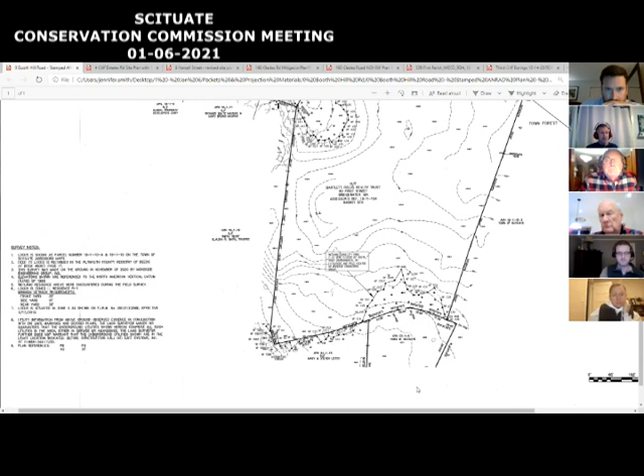I feel like if there's anything that's unclear on the latest version, that the ORAD should reflect that it's unclear, and that our approval is only what we're approving, but that there are other resource areas out there that will warrant additional investigation when a notice of intent is filed.

What do you think about that, Steve? Yeah, and actually you could talk about where the intermittent reach is located. It's located between flags A72 through A63, and A9 perhaps, or A10 to about A1. So that's what I would do with that, to more clearly define the location of the intermittent stream reach. It's not called out on the plan, but you have a line that shows where it was on the original Murphy plan.

Does that make sense to you, John? Yes, it does. And ultimately, the goal of this is to establish the limits of the commission's jurisdiction, with that intermittent stream located within the boundaries of the delineated BVW. Yes, no change within the commission's jurisdiction. All it would do is it would necessitate additional considerations if in the future there is any proposed activity there.

Say there was a roadway that was proposed through there, then we would need to meet the mass stream crossing guidelines associated with the intermittent stream. But it wouldn't extend the commission's jurisdiction by having that delineated. So we're fine with approving the plan as it is, and whatever the commission needs to do to make sure you reserve your rights to review any additional resource areas, that's 100% fine. We're definitely okay with that.

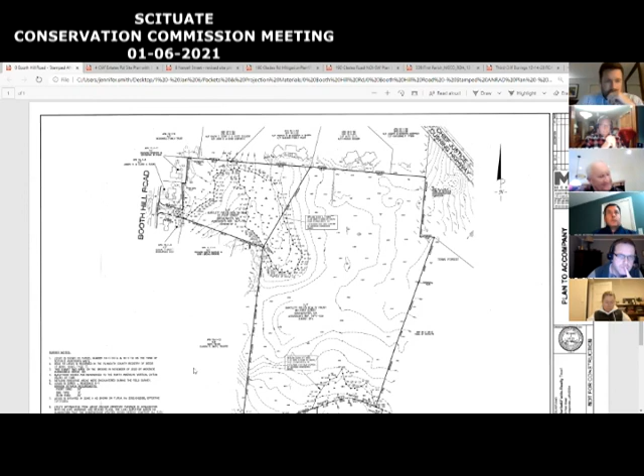Can you hear me now? We can. I just wanted to clarify that none of this plan was on any of the documents that were on the website. And so for you to be acting on it or having a hearing about it when no one can even see it, I think is unusual at best. That's my comment. I find it difficult for you folks to do this without any of the members seeing it and voting on it. Thank you.

Mr. Horsley: I don't mean to belabor this, but if the commission decides to move ahead, I think the minutes should reflect that they're approving a plan that we cannot see tonight. I'd like to see where that stream is indicated on this plan. You're essentially approving a plan that we can't see, similar to what Mr. Badger just said. I'd suggest either we pull up the plan tonight and look at it, or we continue to the next meeting.

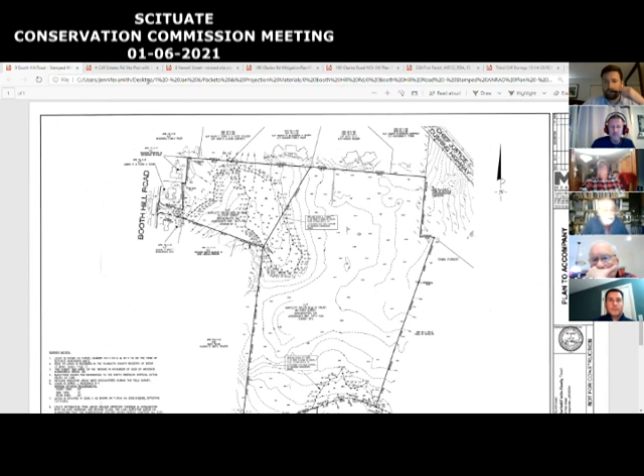4 Cliff Estates Road. This is Morse Engineering. Do we have somebody from Morse? Oh, Bill has a hand up. Yes, this is Greg Morse, I'm here. Greg, hold on one second.

Bill, do you still have a hand up for something? Can we unmute him, Amy? Bill? Oh, it looks like he took it down. Yes, my question is, I know the hearing was closed. What was unclear from the vote, because we asked that the commission vote to approve the ORAD - was that part of the vote that just occurred? Yes. Okay, great, thank you very much everyone.

Greg: Good evening, for the record, Greg Morse, registered engineer, Morse Engineering. This is a continued notice of intent for a property located at 4 Cliff Estates Road. The property owner, David and Katrina DeRubo. I presented this to the commission back in December, and as you likely recall, it's a notice of intent for their single-family home. They're proposing a series of small additions to the house - there's a deck addition off the back of the house, and some bump outs to the foundation overhanging the foundation proposed in certain locations.

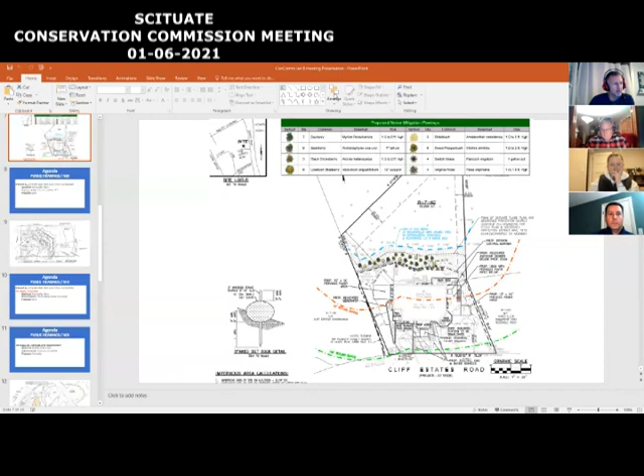I don't remember that. I thought that we just talked about adding some additional plantings along that back slope, was my recollection. We talked about the pervious paver area and what they're doing with that. So I thought we were down to just the plantings. Just plantings, if memory serves me.

Yeah, that was a long night. Yeah. Okay, I feel like I do remember a little bit about that, Amy.

We touched briefly on stormwater. The project doesn't trigger any of the stormwater thresholds for the stormwater bylaw, but it was designed so all the patios, the walkways, the driveway, those all are pervious surfaces. They have a paver on top, and then underneath that is in excess of a foot of crushed stone.

Which would allow infiltration of any stormwater through those surfaces. The additions to the house are extremely small. There's no significant increase in stormwater runoff off of this site, and it discharges to land subject to coastal storm flowage, which typically you don't need to mitigate rates and volumes of runoff for. But again, all of the driveway, all of the patio, all of the walkways, are pervious surfaces with more than a foot of crushed stone beneath them.

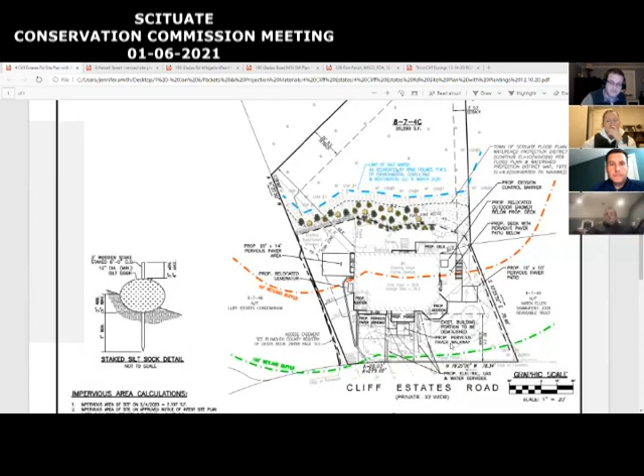So now we're at 8 Newell Street. We're going to continue. Which one? The dock. The dock. It's the... okay, next so that's the second one.

So this is for the pool. Yeah, yeah. Okay, and who's on for this? John Zimmer. Okay, John.

Frank, you'll remember I'm recused on this. Got it.

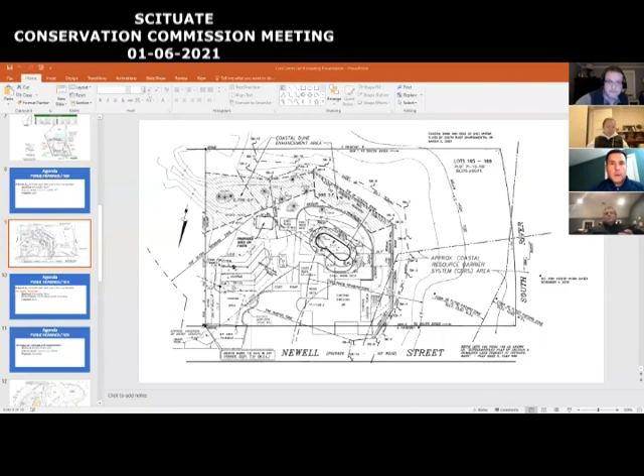All right, can you hear me again? I can. All right, I had so much fun with the first one, I decided to stick around for another one. Again, for the record, my name is John Zimmer with South River Environmental, representing the Winds.

I unfortunately was not part of the original filing for the pool, nor was I able to attend the field review with the commission. But Chris and I went over it in depth, and we talked about some ways that we could address some of the commission's concerns with respect to the pool. And what we've come back with is a revised design, which basically decreases the size of the pool and the surrounding porous paver patio to about 850 square feet total.

We've relocated the pool. You can see it's been shifted, so it's no longer a rectangle shape. It's now a kidney shape, and we've fit it within basically the footprint of the existing pool and the disturbed area around the decking. That's really to offset the distance from the work to the coastal bank associated with the South River.

What we've also done is designed a coastal dune enhancement plan. So we're looking at doing about 3,700 square feet of enhancement to the coastal dune. I'm not sure if you folks remember the site, but there's not a ton of vegetation out there. It's a coastal dune. It's functioning to some degree, but I think that with what we're proposing to enhance the dune, it is going to help it function.

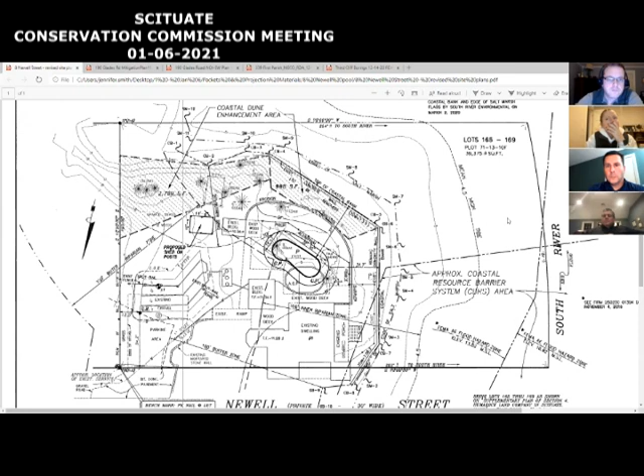I'm not familiar with how that works in a pool. Maybe you could help me with that, Amy? Yes, our interpretation is that it is a structure. So wouldn't that have to be... and I know that ruins an in-ground pool. I'm just trying to understand the regulations, is that it's no longer an in-ground pool, but can a structure be placed in a BFE?

Or is it because it's in ground, we don't consider that it's as hazardous as, say, if it was like a house in a flood situation? No, our professional colleagues have recommended that this would be a structure and that it would need to meet those BFE requirements.

Which you really couldn't do, like I said, with an in-ground pool. And I do remember this, and I'm glad they made the kidney-shaped pool. It was much closer to the bank before, so they've done a good job pulling everything away.

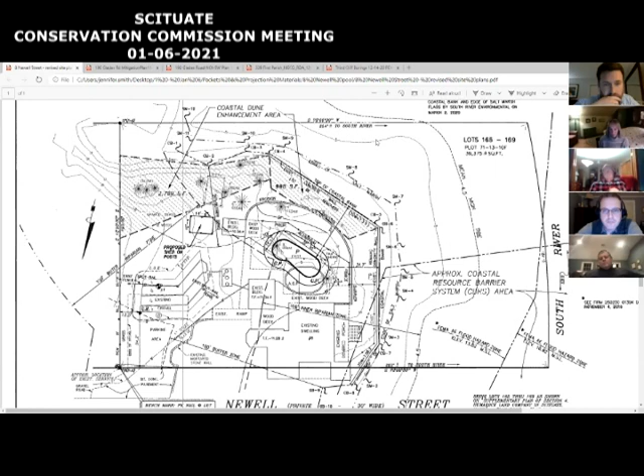So my question on this is, if that's considered a concrete structure that's basically subsurface, how's that different than a distribution box or something associated with a septic system? Would that also be considered a structure? I mean, I would think it's the same form, and well, not function, but same form. Where does the definition of structure get differentiated? I understand that's kind of an extreme example because you're not going to elevate a distribution box above the base flood elevation, but thinking along those types of lines.

Yeah, well, you're getting to the heart of my own question, John. That's what I'm trying to figure out. Sorry to interrupt, Doug. Go ahead. I believe Chris is on the meeting, and I believe he did speak with the building inspector about this, either the building inspector or Board of Health, and I'm not sure if Chris could provide any more detail with respect to that.

Let me go ahead and pass on to other commissioners because they may have other questions besides that. But I'm just trying to figure out, since it's the first time I've seen something like a pool, but we did have a similar application, I think that's probably still in front of us, and there was going to be a hot tub. It was actually in a velocity zone, but how do we regulate those kinds of things, and what standard are we supposed to adhere to? That's my question. So let me pass on to others so they can have a chance to discuss that.

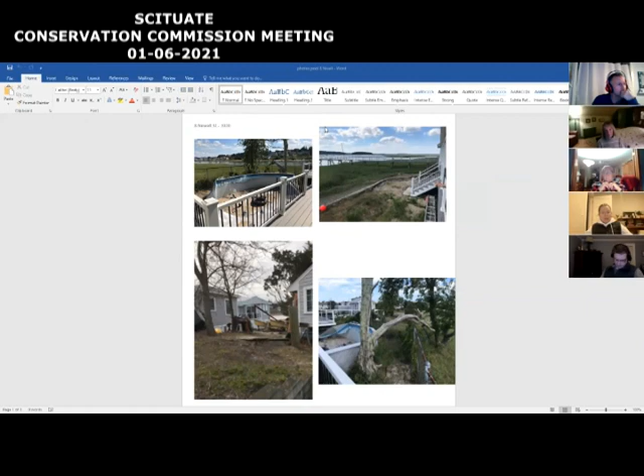John, what were you suggesting as an alternative to closing tonight? Well, what I recommended was to allow the commission a little bit more time to review the information that I provided with respect to compliance with the performance standards. And if we continue to allow that, we'll see if there's anything else we can do on our end to address some of the concerns the commission has.

So are you requesting a continuance? I'd like to get Chris's opinion on that. I think my sense is that if we close tonight, it's not going to go in our favor, and it may ultimately not. But I think that if we could take a little time to review the information and kick it around a little bit more, that would be appreciated. Well, you have the right to request a continuance.

Mr. Nguyen, can we let him speak? I can see your mouth moving, but not... He's muted. I think your own computer should be on. Hit unmute, Chris. There we go. Thank you.

Okay, so yeah, I appreciate the concerns that have been raised, and we talked about the prior meeting. Why not just do something right in the area that's there? And the two items that I had mentioned before were that safety consideration, and we thought that we were creating a net benefit, which John had articulated there. If the commission doesn't view it as a net benefit, I guess I'd more ask this in the form of a question: what location of this would you view it as a net benefit?

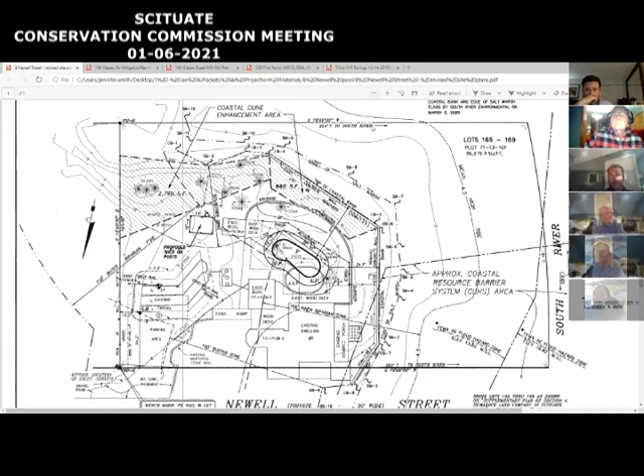190 Glades Road, it's an amendment. If somebody from Cavanaro... We've got Brendan on the line. Okay. Frank, you need to read the opening of the public hearing for this.

On January 6, 2021, 5:15 meeting of the Scituate Conservation Commission, a wetlands hearing under Chapter 131, Section 40 of the Massachusetts General Laws, Section 307.00 of the Town of Scituate Code of Bylaws, and Section 320.50 of the Town of Scituate Stormwater Bylaw, to amend the order of conditions and stormwater permit issued under DEP file number 68-2779, regarding the application of Stephen and Rita Pace to construct a new single-family dwelling at 190 Glades Road, Scituate, Mass. Abutters and other interested parties are invited to attend. Information to access the virtual meeting will be available on the posted website. Good evening.

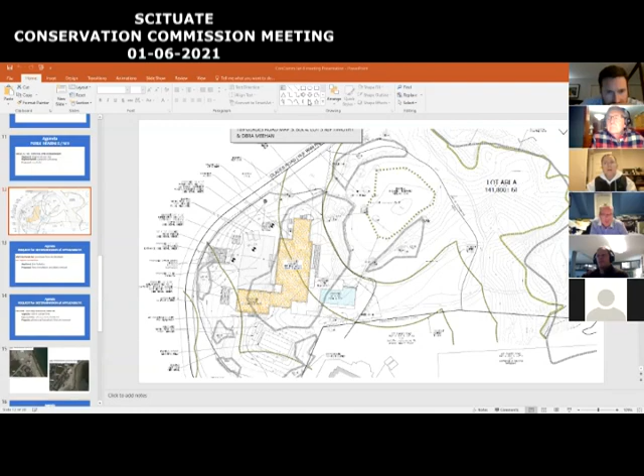So we let Brendan in. You there? He's... yep, he's all set now. Hi, Brendan. Okay, great, thank you. For the record, Brendan Sullivan with Cavanaro Consulting. You're a little muted, Brendan—can you turn your volume up, please? Turn my volume up... is that better? I think I can hear you now, yeah. Okay, that's better.

Once again, Brendan Sullivan with Cavanaro Consulting, registered professional engineer and land surveyor, here with the new owners of the property, Stephen and Rita Pace, who currently live over on Surfside Road in Scituate. Also on the line I have Brad Holmes from ECR Environmental and Charlie Page, the landscape architect. Brad will go over some of the mitigation, the change in the mitigation plan that we've done for the area in and around the wetlands and the coastal bank. This project was originally approved back in April of 2019 as a similar single-family home with auto court, septic system, and landscape improvements. It went through the notice of intent process and the stormwater process as well, and since we're running these kind of concurrently, I'm going to marry those two and talk about both at the same time, if that's okay.

Since the project was approved, the previous owner, who was the abutter, Mr. Burek, put in the landscape, the siltation barrier fence, the silt sock, took some trees down, and installed the septic system—the septic field and septic tanks. Since then he sold the property in spring of last year, April or May, when the Paces purchased it. They've come forward with a different house design, basically the same orientation of the main house, with an L-shaped garage coming off the southwest portion of the house, and the same auto court with access to Glades Road. The only difference is they have a pool in the backyard, and they've rotated the house a little bit so it's gotten closer to the wetlands—it used to be 72 feet, now it's about 62 feet away from the isolated vegetated wetland that sits basically on top of this knob.

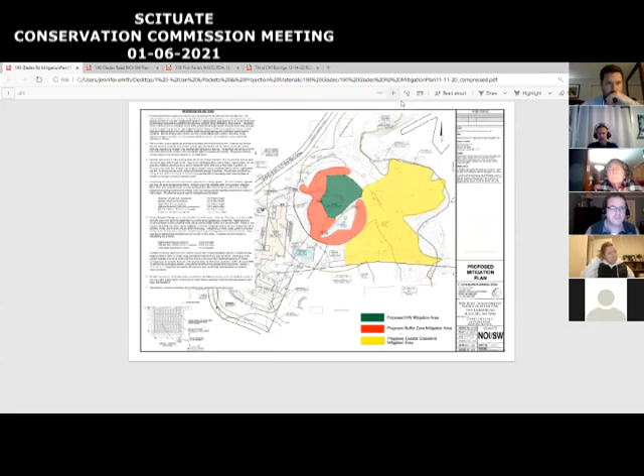The wetland itself is fairly clean and free of invasives, but the buffer zone surrounding it has got a moderate amount of invasive shrubs and vines. So what we're proposing to do is, generally in that area in red, we would go through and remove the invasives selectively to release the native vegetation. We'd also do interplanting with native shrubs within the wetland and buffer zone to enhance the area. I've included a plant list on the left-hand side of the page.

We'd also do some pruning and removal of just, even though they're native, a lot of grapevines that are pulling and strangling trees that could really be removed to allow those trees better form, and a little bit of pruning up there. That area gets really beat up from the wind, and you get wind throws, so some of the trees could use some work just to improve the form and remove some of the dead limbs.

And the area in yellow now is basically mowed—I wouldn't say it's a field, because it's really just mowed shrubbery, low growing shrubs.

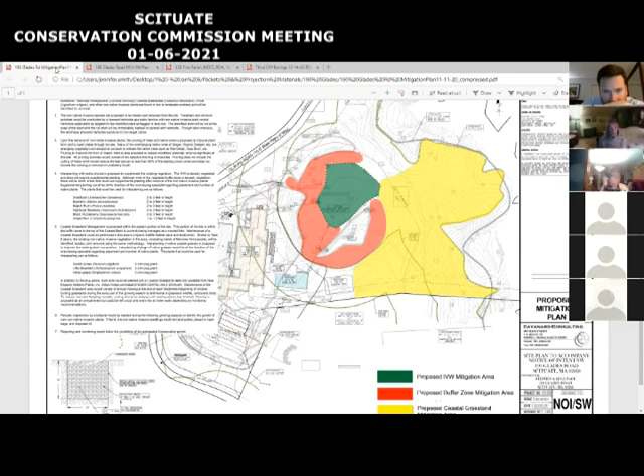Because if you remember, this project years ago was approved. There was actually a project prior to Mr. Burek who got a project approved, and then Mr. Burek, being the abutter, the house was going right in front of his view, so Mr. Burek purchased the property. Once he got control of the property, he went to permit a house that was conducive to his views, and still keeping the views aesthetically pleasing for the proposed house.

In the meantime, too, he did some cutting in the wetlands and the buffer zone. So then there was an enforcement order. That's why there was the enhancement plan, the buffer plantings - the mitigation wasn't for, if you remember, I think Penny can remember this, maybe you too Frank, the mitigation plantings weren't for the construction of the house itself and the disturbance within the 100. It was really for the cutting that he did in the 50-foot buffer and in the wetland area.

So when we say we're doing the mitigation plantings, it's not for the proposed house. There was really no mitigation proposed for the original house. The mitigation was to restore what was cut there years ago, and a lot of that, as Brad said, has come back. Some of it good, some of it bad. So this plan kind of addresses all of that.

We got out there, we started looking at some landscapers to try and do the mitigation. He said, well, do you really want me to dig up plants to put in plants? That doesn't make sense. So that's why Brad came up with this plan - to weed out some of the bad ones and also supplement it with some good ones. As you can see, the original plan was just the area in red, so this quadruples it. I can get the areas for you, how much more mitigation we're doing there. But yeah, I can do an overlay of where the existing house was and all of that, and we can go from there.

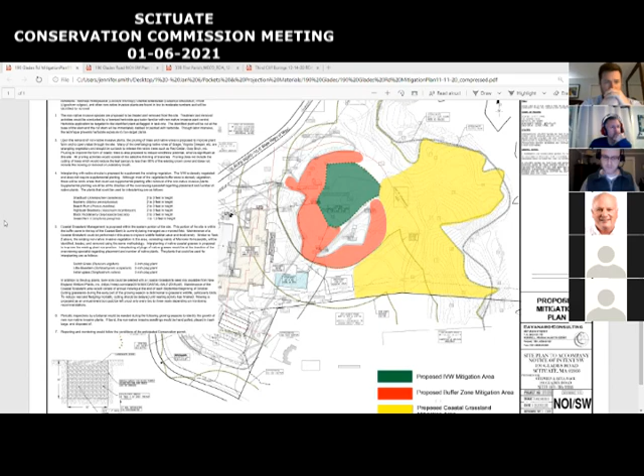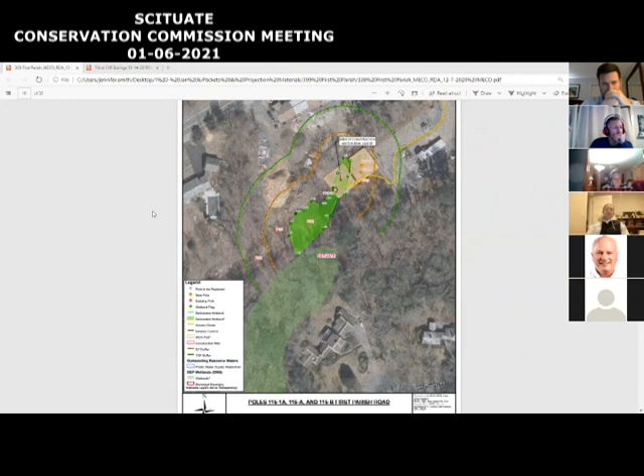So 150 First Parish Road, this is a request for continuation to March 1st. I'll make this a motion: we continue 150 First Parish Road to March 1st.

Second from Jen. So all in favor, Richard, yes. Doug, recused. Penny, yes. Jen, yes. Andy, yes. Brendan, yes. Frank, yes, thank you.

Okay, Frank, we have Dave Smith from GZA and Sean McCarthy online from the Department of Public Works. Okay, thank you. Whichever one of you guys wants to go.

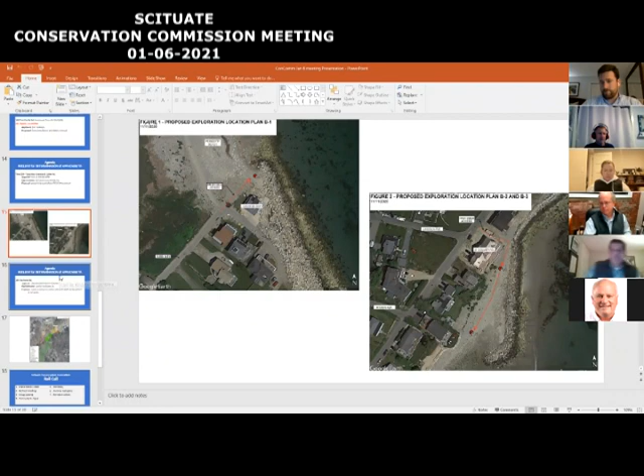On January 6, 2021, during the 5:15 meeting in the Town Hall, Scituate Conservation Commission will act on the request of the Massachusetts Electric Company for a determination of applicability of the Massachusetts Wetlands Protection Act and the Scituate Wetlands Bylaws for activities related to a new distribution pole, new equipment on poles on 399 First Parish Road, Scituate. Abutters and other interested parties are invited to attend. Information is available on the town website.

Good evening. Who do we have from Epsilon? I'm not sure who's on the call from Epsilon. Maybe they should raise their hand. Is it Matt Kelly, maybe? Yeah, he was raising his hand. Physical, not digital hand. Okay, Matt Kelly's on.

Thank you, good evening everybody. My name is Matt Kelly, representing the Massachusetts Electric Company. I work for Epsilon Associates, and they are proposing some maintenance activities and some grid modernization activities. The plan is to replace an existing distribution pole. The pole will be replaced in kind. The existing pole will be removed. Specifically, this pole is identified as 116-1A, and it is located in a bordering vegetated wetland.

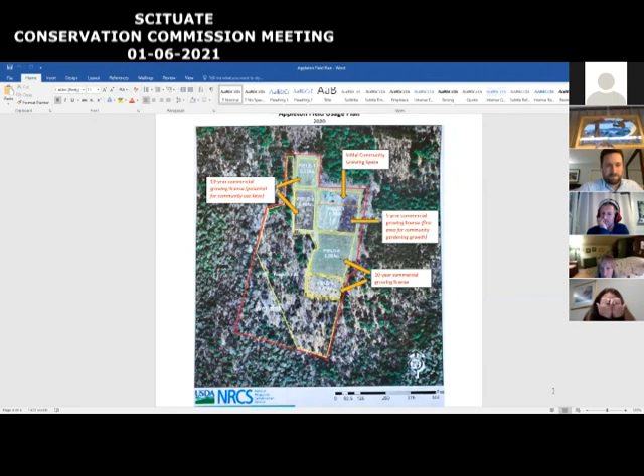Well, I mean, I can do a quick presentation. I think what I'm looking for here is whether the commission is supportive of the main idea, and then what are the next steps to help us drive this?

So I can probably be pretty brief. Sure, and just trying to move this forward.

So we have this opportunity to restore farming to Appleton Field. Jen has the map of the field up, and the proposal I've come up with, working with a few folks, is to see in field 3 there, right when you walk into the field from the parking lot, that front half has already begun to be worked on by some volunteers. We were looking to make that a community gardening space, some kind of shared space with folks learning from experienced gardeners and farmers to produce food locally, likely given to the food pantry, and then probably some mix of private citizen plots for people to garden.

All of it organic, no-till, with ecology in mind. I think I would love to see a really robust and booming operation out there when it comes to community farming, and love to see all of field 3, and maybe field 1 and 2 eventually being used for community farming and personal garden plots, letting people in town use that field. But I think that's down the line.

Having talked to some folks who have run community gardens and who are part of Teak Sherman here in town already, you can see where I've added my own orange line. It seems like that front part for the next few years, if we could fill that up and get it into full use, that would be pretty good. So that would all be used for community farming.